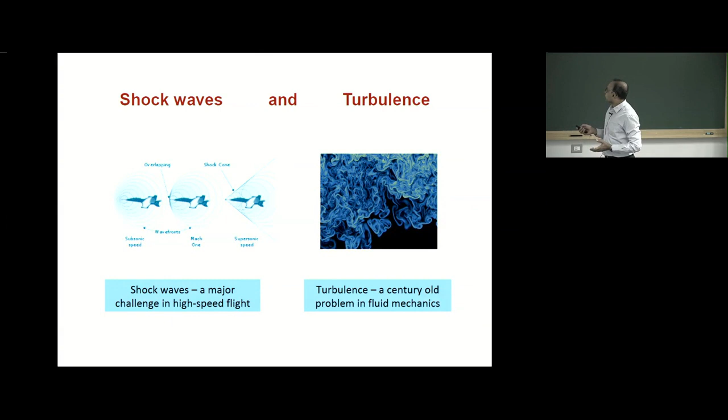So the question that we try to answer from very basic fluid mechanics is: what happens to turbulence? How does its nature change? How do the scales change? How do the intensities change? And the related question is what happens to the shock wave? The shock wave also doesn't quite remain the way it was if a uniform, nice, simple flow were going through it. The shock responds to the turbulence by becoming unsteady and oscillatory, and in extreme situations, it can also break.

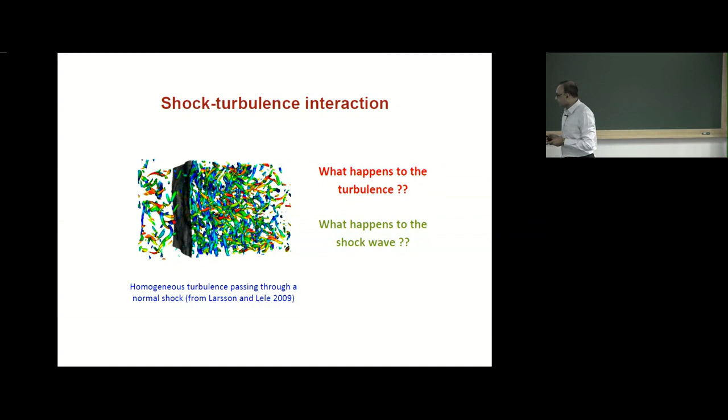It turns out that this problem, what we call a shock-turbulence interaction, plays an important role in many scenarios. So as part of this talk, we will first look at the physics happening inside this and how it affects engineering applications and scientific things in nature as well. Okay, let me start with the engineering application.

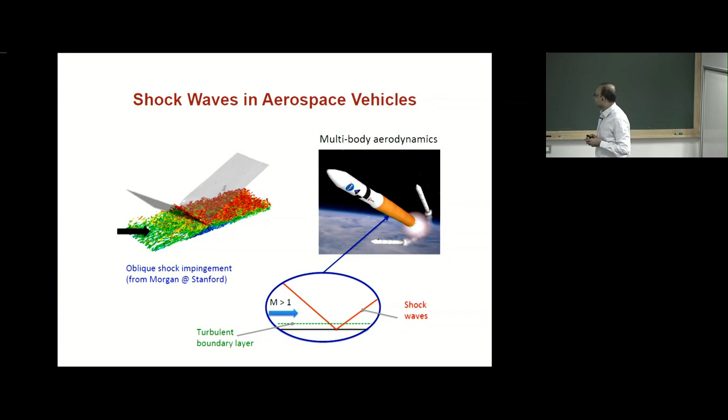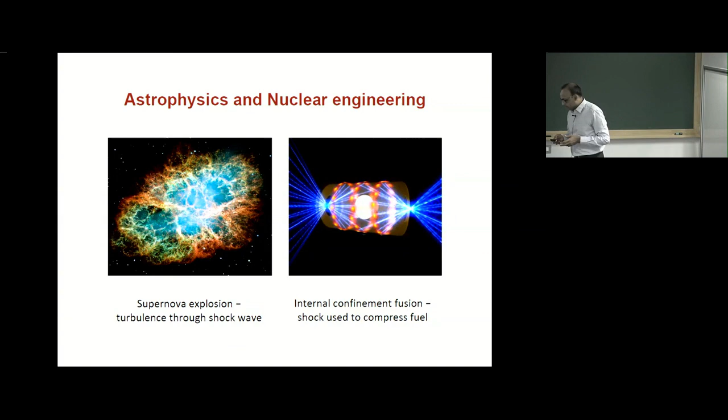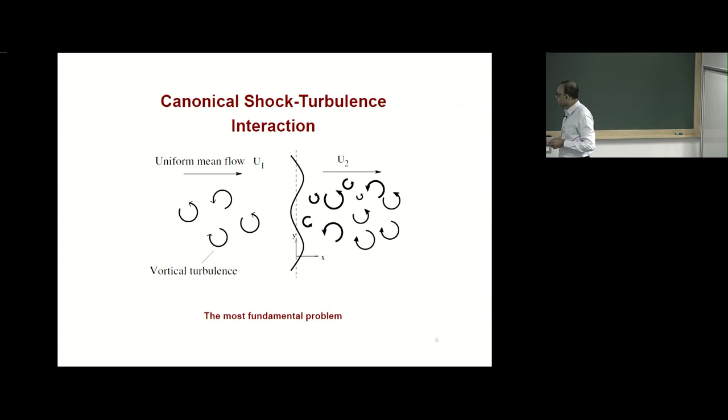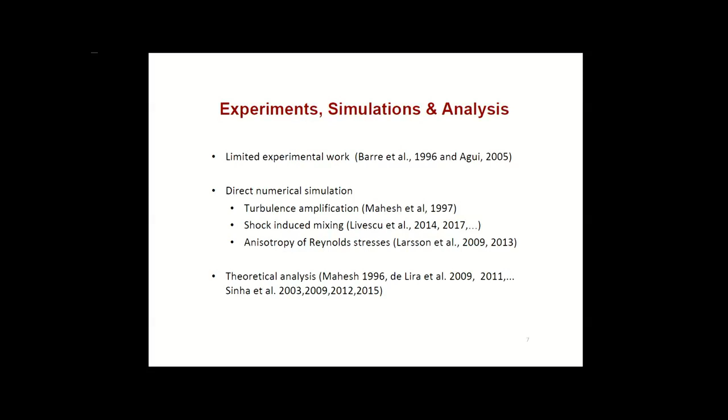Okay. A few background kind of work. This canonical shock turbulence interaction has been studied quite a lot, probably because of the simplicity. The experimental works have been very limited because it's not easy to generate things in a controlled way in an experiment. There have been very few works. The majority of the research has been in direct numerical simulation, where you would actually simulate the turbulence in all its nonlinearity and three-dimensionality, and then pass it through a shock wave and study what happens to it in all detail.

So a direct numerical simulation would solve the Navier-Stokes equations for a full range of length scales, as we call it, and try not to make any assumptions about the turbulence, and try to capture all the scales of turbulence. Just to be precise, yeah, it's compressible. It is compressible, absolutely. It's the compressible Navier-Stokes equation. In fact, you're right. Sometimes we forget to tell ourselves, but we are solving the compressible Navier-Stokes equations for this problem.

So, among all the works, we identified three major groups, and I'm sure there are many more things we may not have included. But initial work was in the area of how much turbulence gets amplified across the shock. So there was a series of works from Stanford in the 90s, which looked at whether we can do DNS and study what's happening to the turbulence, how it is getting amplified across the shock.

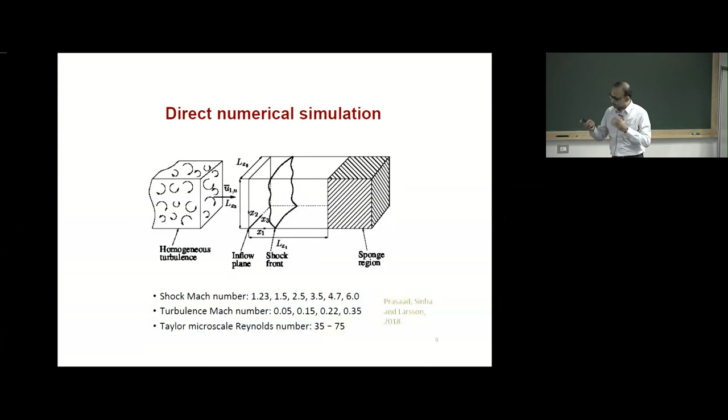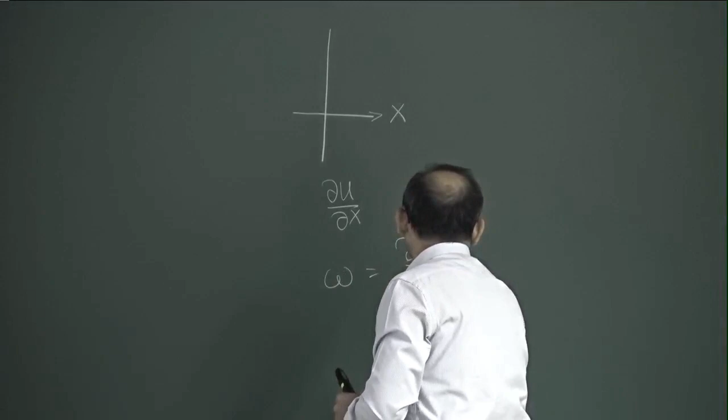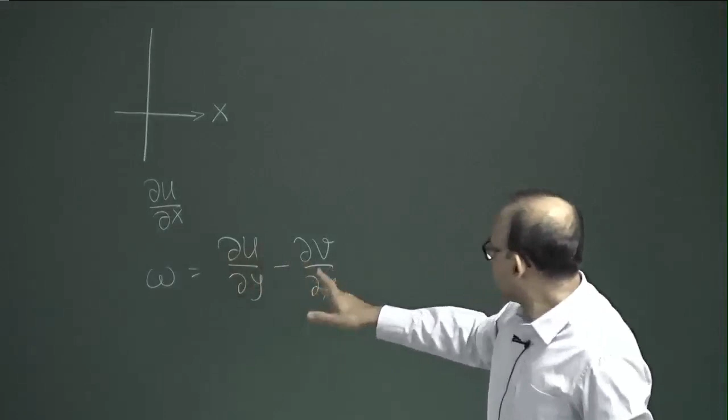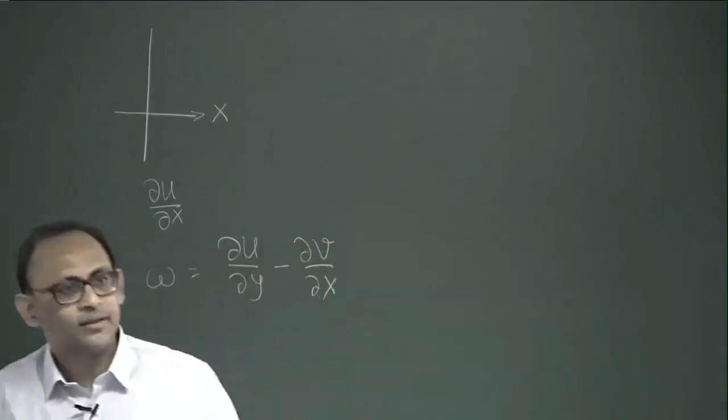Okay. So we looked at turbulent kinetic energy in terms of velocity fluctuations. We looked at vorticity fluctuations. Next thing we will see is what happens to thermodynamics in terms of pressure, temperature, density fluctuations.

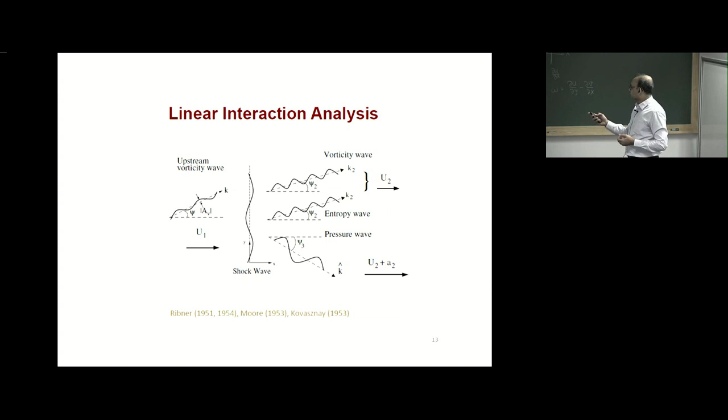The important thing here is that when we shift from the, let's say, lab frame to the shock frame, we have to look at this quantity which we call xi. It's a function of y, z, and t in this framework, x being the shock normal direction. It determines the shape of the shock, essentially, as a function of y and z. And if we take a time derivative at any point, it will tell us how fast the shock is moving at that point. And if you take a y or z derivative, it will tell us how the shock is curved, how much it is inclined relative to its mean position.

Okay, very simple mathematics. Once we do that, and we make an assumption that all these quantities are small, that's of course the basic starting point, we can actually do this transformation, drop some of the second order terms, keep the first order terms in the fluctuations. What it shows is that the velocity transformation brings in u prime. If u prime is the fluctuation in the fluid velocity, xi t is the shock speed. The difference between the two is what's important to us, because now we're sitting on the shock wave and looking at the flow coming at us. And you will see this u prime minus xi t coming many times when we try to understand the equations and the physics. When we go to the second and third components, there is an angular variation of the shock that comes in, again when we have linearized the problem.

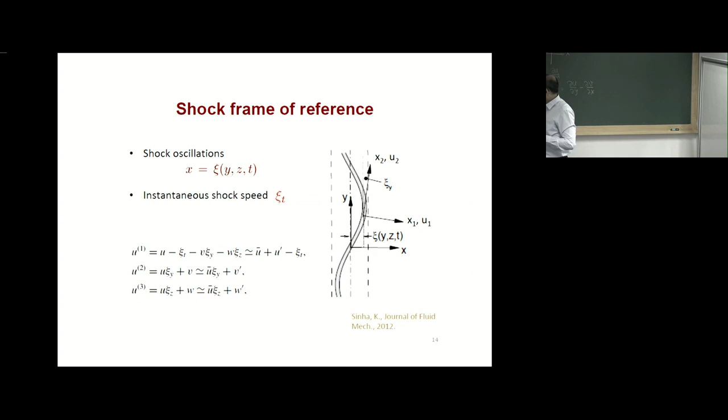I will, for the purpose of this presentation, stick to this part and then try to explain to you what we are getting out of it. Let's look at the next thing. So I'm trying to tell you the building blocks of this analysis. There is a lot more detail in these papers. What we're doing is that we take what we call the elementary interaction, a single wave interacting with the shock, generating multiple waves, which can be solved analytically.

We start with the spectrum of turbulence, upstream spectrum, the distribution of energy as a function of wave number, and then we integrate it for all these single wave interactions, and what we'll get downstream is the turbulence statistics. So as if turbulence coming in was split into component waves. Each wave was made to go through the shock wave, and because we have made the assumption of linearity, dropping non-linear terms, we will get the output for all of these individual wave interactions. Then we integrate over all those outputs to get the downstream turbulence.

Yes. The wave number of the distorted shock, is that related to the incoming? It is. It's exactly it. In fact, with the length scale in this elementary interaction, the wave number of the upstream wave and its orientation are the two important things. That determines how the shock will be, what the wave number of the shock wave will be. So your small amplitude assumption is really an assumption on the kind of input waves you have. Precisely. In fact, small amplitude is actually for u prime, v prime, what is coming in. That relates to the shock also being deviated by small amounts from its mean position.

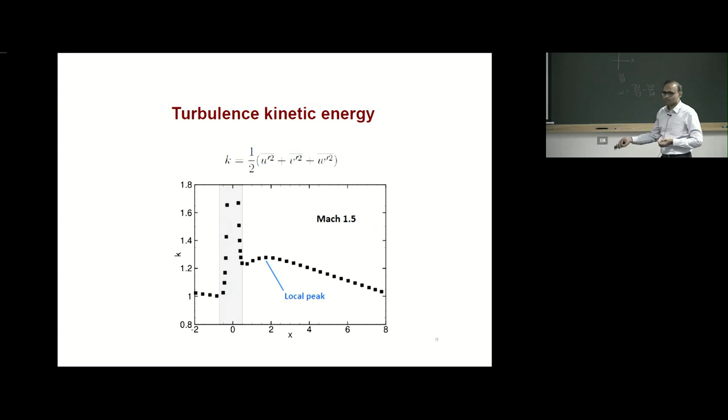But yeah, so RKK is the Reynolds stress, the trace of the Reynolds stress, which is twice the turbulent kinetic energy. They're connected. So that plot, the other one? Yeah, I didn't go to that.

So according to the linear analysis, it was kind of saturating after a certain Mach number. Yes, something about 3 or so. But increasing the Mach number will also make the non-linear effects prominent. Is that why the linear analysis is sort of saturating? In fact, our understanding is that the saturation will happen even in a non-linear scenario.

If you have the shock wave and you measure the strength of shock in terms of how much pressure rise it gives, how much compression it does, it also saturates in the limit of high Mach. So all these quantities saturate at high Mach number. In fact, I would say this is actually not an aberration. Usually many things saturate. Anything else? Okay.

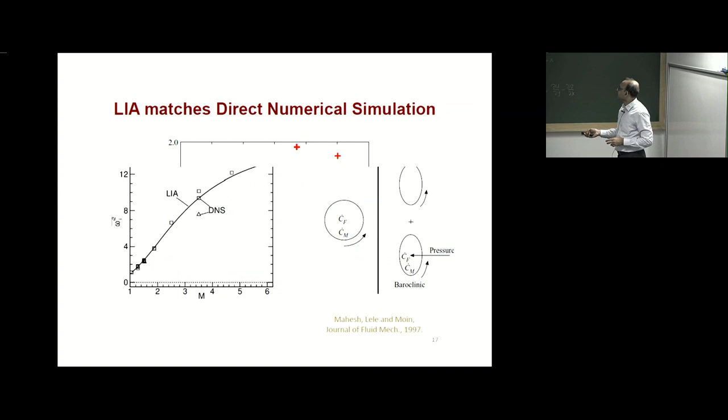Here's the other one, which is actually far easier to interpret. What we're plotting now is the vorticity fluctuations in all three directions. We defined an enstrophy, which was like energy, but using the vorticity fluctuations. So this quantity represents the strength of vorticity in all three directions taken together. Again, we have normalized it with the upstream value. The y-axis says by what factor it amplified, the line is LIA and the symbols are DNS.

Apart from this, which has a separate explanation, the match is quite good. And it's actually because of how you can extract the data from DNS. For vorticity, there was a very clear peak, not cluttered by the shock oscillations. No dip and going up, no transient. You pick this value, put it on the plot, your LIA line almost goes through. So LIA is capturing the basic part quite well, we thought.

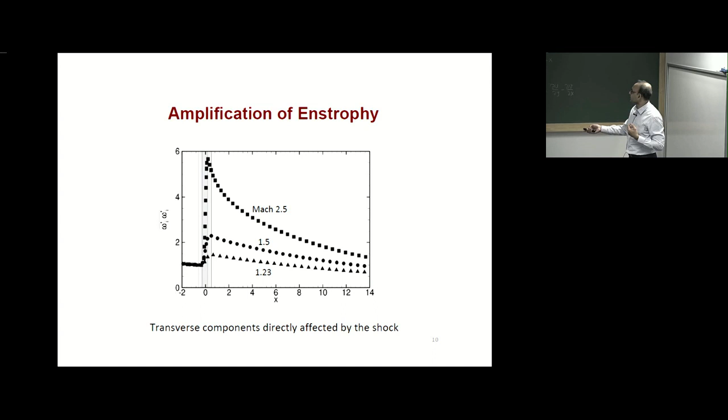There is a bit more interesting thing about vorticity in terms of what I explained earlier, the circular vortex becoming squished because of compression. But there's also baroclinic effects. I think we're going a little slower than I thought, so if somebody is interested, we can come back to this.

Okay, the next thing is what's called propagating and decaying regimes, which is an interesting artifact of this interaction. This explains why there's a dip and going up, the transient. This is from papers in the 1950s, they did quite a good job, and we borrowed it from them. Let's say we have a shock wave, and a wave comes and hits.

The wave imposes something on the shock as well, and the shock starts oscillating. The y-direction speed of the wave is the same as on the shock wave; they're in sync. So now there's a wave propagating on the shock. If you are sitting on the shock and moving with the wave, you don't see the wave oscillating anymore. It's just a stationary wave on the shock. Essentially you're changing coordinate frame, moving up with this wave.

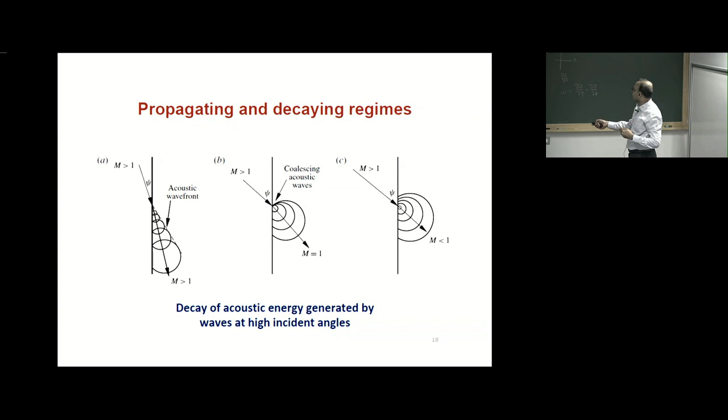Okay. So this thing is what gives us the... let me go back and see how to connect the dots. When I say that the acoustic energy drops quickly as we move away from the shock, this is what happens in this scenario. This shows up in the form of these drops. We can actually show that it's an exponential drop, with x being the distance from the shock wave. It can be worked out again from this analysis.

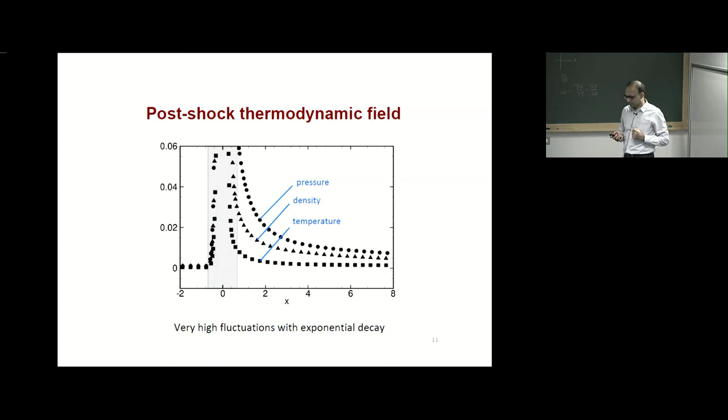And the thermodynamic fluctuations, pressure, density, temperature, at least for Mach numbers up to about 2 or 2.5, show this very characteristic exponential drop. It turns out that in this range, out of the three Kovasznay modes, the acoustic mode is dominant. So all of these are following the acoustic mode pattern that we have studied in the transient. Okay.

Here is another place where this acoustic transient makes a difference: heat transfer. Now, how do we define heat transfer? We take the velocity fluctuations at a point, take the temperature fluctuations, and here I've written that in terms of internal energy fluctuation. There's a factor of the specific heat.

If you correlate the two, it tells you how the velocity fluctuations are carrying temperature with them. If this correlation is high, it means there's a lot of energy transfer because of the turbulent mixing. If it is low, the other way around. So we look at this quantity; in fact, it's called the turbulent heat flux or turbulent energy flux.

That's the name technical. So we look at this term from the DNS data and from LIA. So we have, this is the shock location at x equal to 0. These two dashed lines are from DNS, which show the shock oscillations. Upstream, we don't have much of temperature fluctuation. This quantity is almost zero. There's no net heat transfer.

Downstream, we have this peak value followed by a decay. The line is from the linear inviscid theory, and these symbols are from DNS. Two different Reynolds numbers are plotted. And the thing to note is all of them have this peak, a positive peak in heat transfer.

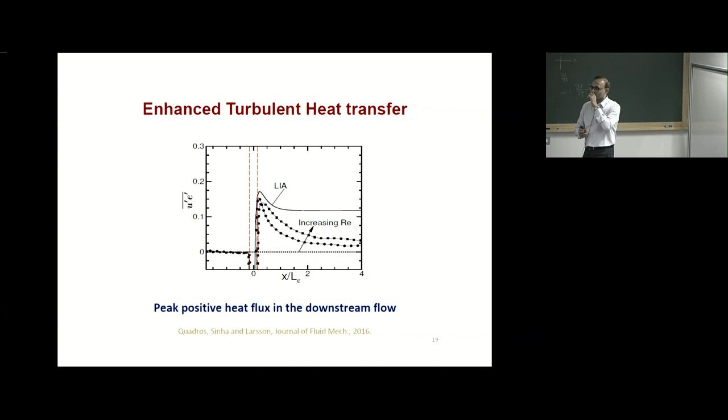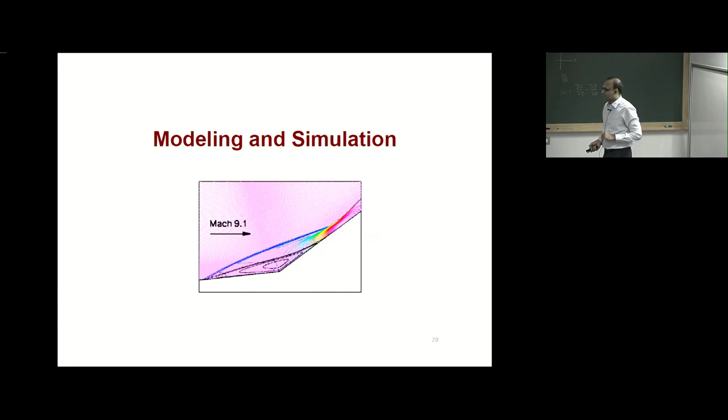Maybe I'll skip a few things, but let me go a bit faster here. We want to predict how much. Maybe I should go to heat transfer because it's a bit short of time, right? Yeah. So let's go to heat transfer. Let's skip a bit. Sorry about this. Let's look at this for a second, and then we'll go to heat transfer.

So this is a picture we are familiar with: a shock wave coming from the adjacent side of the vehicle, impinging on this surface, where it has a turbulent boundary layer. This is what we think of as the inviscid scenario. When we have the boundary layer, we actually have flow separation. There will be a reverse flow because a shock wave is an adverse pressure gradient, and flow can go backward. The boundary layer can separate.

It turns out that this vortex, that small bubble that forms there, has important implications for heat transfer, because the flow goes over it and then kind of impinges at this point, what we call reattachment. That is the point where we find the highest heat transfer. So the question is, can we predict that heat transfer?

Also what we are showing is this one shock actually splits up into multiple shocks, and many more things happen in this flow than just a simple scenario like this. So when we do CFD of this, we are able to capture the shock structure, compare it with experimental schlieren images and all the other things that go on behind it.

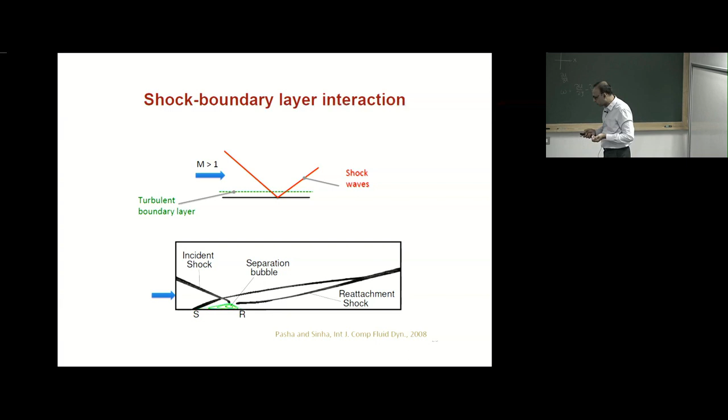I'll skip that for a second. It turns out that if we take the linear theory framework and we write simple energy balance across an oscillating shock wave, you can actually get an estimate for the turbulent heat flux that I talked about, that we plotted earlier. And we can actually write it in terms of Reynolds stress, the shock speed, and the shock strength in terms of R, which is density ratio, for how much compression the shock produces.

This was a very interesting and a very simple expression for predicting the peak heat flux behind the shock. We could not use it directly because there was no way to put it into a CFD code, because most CFD codes use what's called a Prandtl number for turbulence. We had to convert that into a turbulent Prandtl number using some modeling assumptions and all that stuff. But you can see the same form comes in this framework.

And then when we put this value of turbulent Prandtl number generated by the shock wave, the turbulent Prandtl number takes this value which can be predicted based on the shock strength, R, the parameter which depends on upstream Mach number. We take that and apply it to the same flow field where there's a shock wave coming and really complex multiple shocks. So we identify the region where the shock wave is and apply this correction on those points. Prandtl number can be varying depending on the shock strength locally.

And then when we look at actual experimental data, here is the point 0 where the shock impingement happens. The flow actually responds to the shock a bit ahead of it, changes from its undisturbed heat transfer value on the flat plate slightly higher, and then goes much higher where the impingement and reattachment happens. If you don't use the corrected Prandtl number, you would get somewhere here. With the corrected Prandtl number, you are much closer to the experiment. And of course, this is one of the cases.

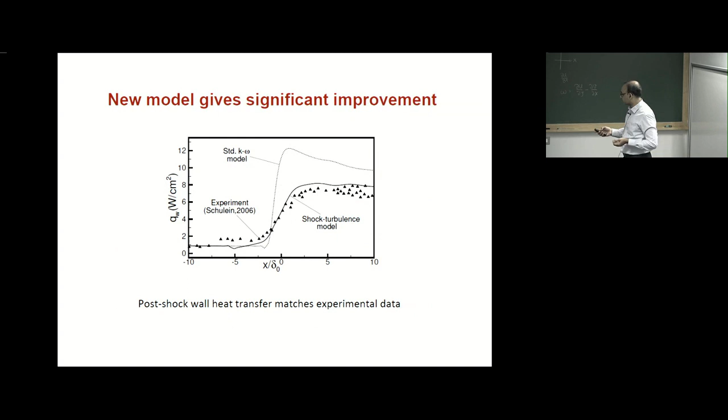So with that, we are probably down to 5% of error compared to 50, 60, 70%, sometimes even more than 100% error. And this does make a difference when you have multiple rocket boosters together and can have heat transfer at these points. There's actually history of these problems in the X-15's flight in the 1960s, where something caused an impingement and there was damage to the aircraft. It had an experimental engine which caused this problem, and it had to eject the experimental engine, I think. But the aircraft landed safely.

So these kind of things do happen in flight. You have to take care of it. You have to fly safely. And some of our predictions will make it easier and better to get the estimate of heat transfer and have adequate protection for this.

I think we are pretty close to the end. So this is the summary slide: we spend a lot of time looking at basic problems like homogeneous turbulence, normal shock, more like toy problems. We spend a lot of time understanding the physics, but then we take it all the way to develop models, implement them into CFD codes, deal with numerical challenges, to simulations where it makes a difference to ISRO or DRDO, whichever projects we are working on. And with that I would stop here.